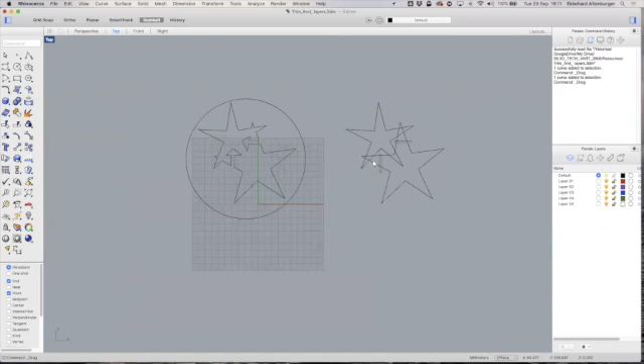We're sharing this screen. Let's say you want to make a plaque with these two stars. You will probably start with something like this, and you want to get these little triangles in so you can make connecting points. You need these little connecting strips to the outside area, because if you cut these stars like this, the little triangles would fall out.

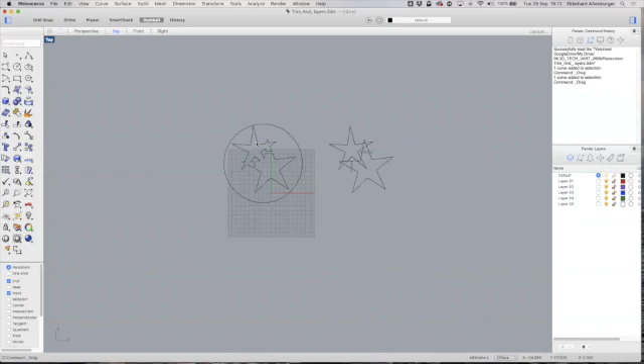I can show you how to design this one as well. You would go here, we've got a little polygon star option. You can select this and make a little star, a bit more pointy. We right click it and do another polygon star.

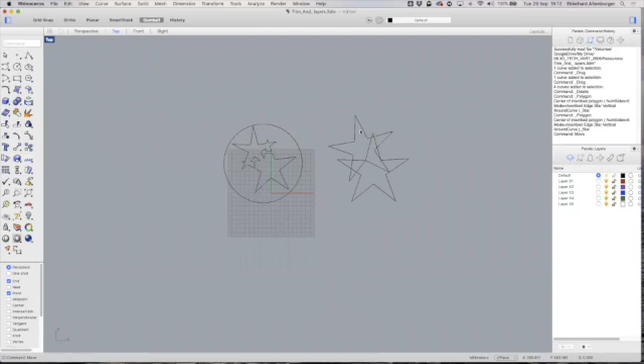Now we want to move this thing. I type in move, grab this one, and move it. I want to move it from here to here, not quite there. Move it using our little arrows, and we can rotate it a little bit like this. Yes, that is looking good.

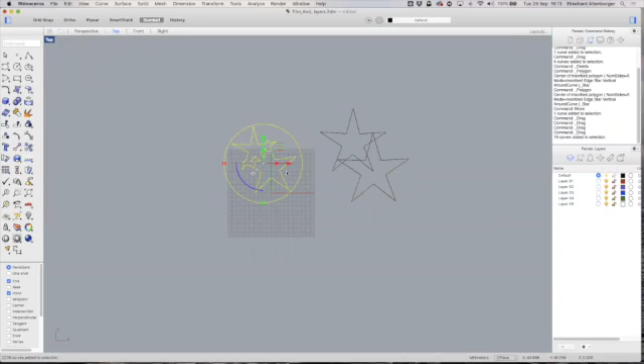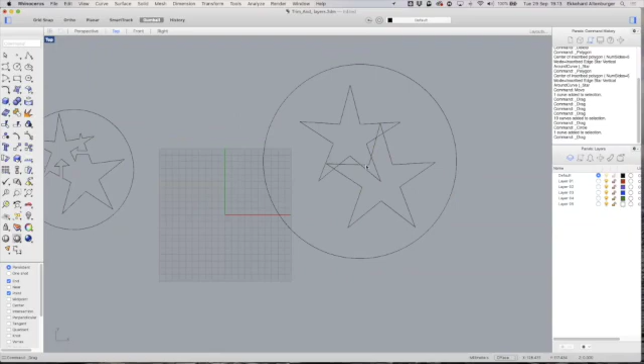Let's put this a little bit on the side because this is where I want to get to. If we want to do a circle, like a little plaque, a Star Wars-y thing, whatever, you want to cut this out so it's cutting through your material. Let's say you have black acrylic, and let's move this one up a bit so we can actually see this, over there a little bit, over here.

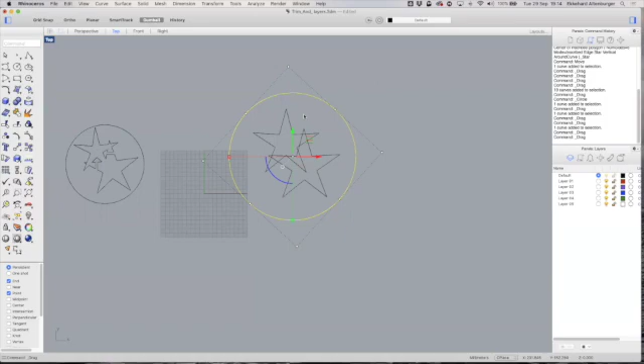This is good. Now we want these triangles and these triangles, not this one. Put it down, let me hit that then. Also scale this up a little bit, just scale it like this, so it only goes in two directions. If I press shift, it goes unilaterally. Okay, this is looking better.

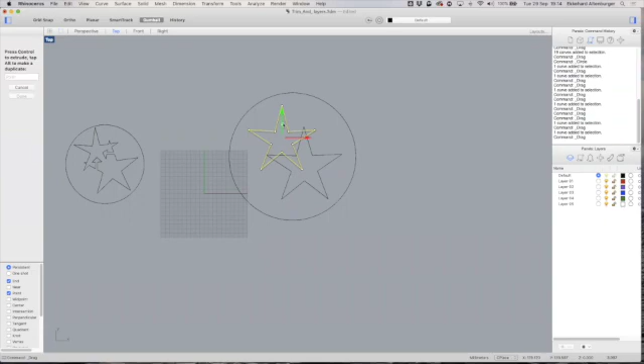So we want to sort this out so we have these little triangles here and here, but the laser is basically cutting these bits off. It doesn't rattle through here, so you want these nice flowing lines where the laser literally just cuts along and cuts everything out in one go.

So how do you trim lines? That's kind of a simple way to do it. You go to the trim option, that is this symbol, it looks like a board that is being wedged. You can go trim and untrim, so you click onto that. Then you see the option - for those who work with Rhino on Windows, this will be selected here on top. So whatever is selected or shown on the left in Rhino for Windows will appear on top.

Now we need to select the cutting objects, the objects you want to cut with. Imagine this is scissors - you want to keep this one, so you want to keep this and this and this line. You want to cut with this line, you want to cut these bits off. So you click onto this and press done.

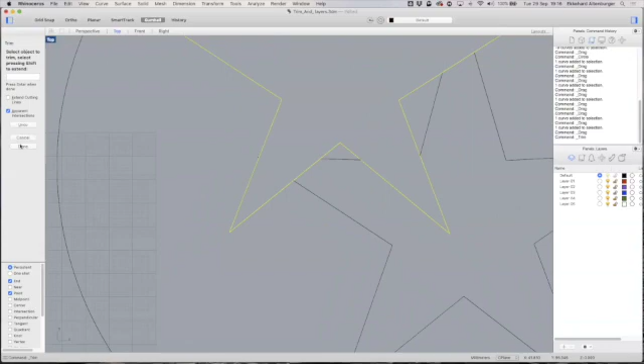Now you get this option: select objects to trim, select, press shift to extend. We can basically select these bits here, and then these bits are falling off. And also here, because we don't want the laser to rattle through, we want to keep this spickle here. Now the problem is the laser - let's click onto this, so it's done now. We also have a little triangle there which we can actually remove.

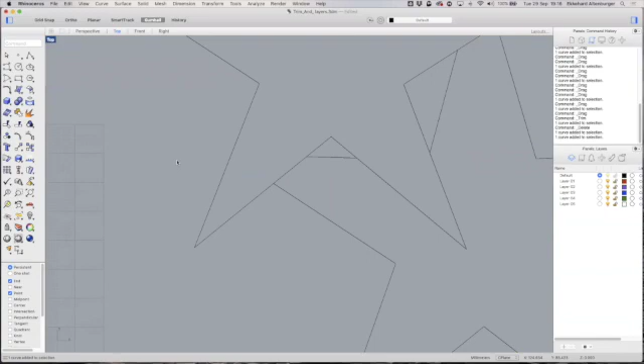We don't want the laser to cut through here, the laser should just run along here. So this is not the cutting tool, but this will be the cutting tool. We right click onto our option, we go trim again, we can again get the select cutting objects, and we use this as a cutting object.

And we select this as a cutting object because we want this to remain. So we press done. And now we select the object we want to delete, the one we want to trim. It's this one.

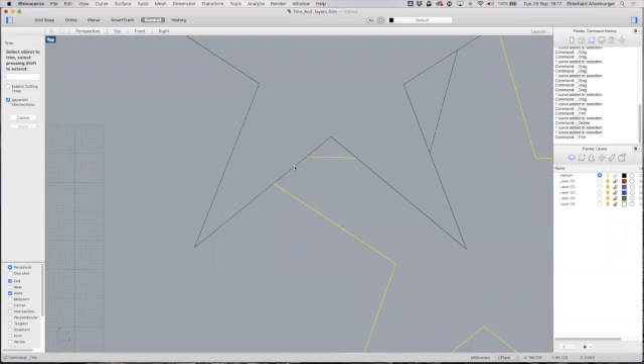Hold on, how does this work? Am I correct? We have these little spickles, and these little spickles, and we don't want to have this one. So we need to do that, done.

So we repeat that, right click, trim. Sometimes you really have to figure out - so we want to have this one, and we want to remove these bits here. So we press done. You can also press enter.

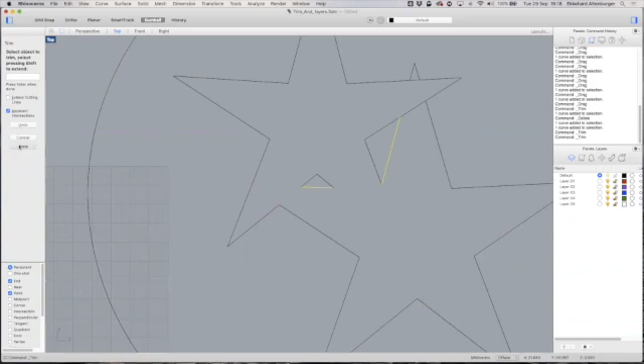And now we remove this. Is this correct? Yes. We also - you basically do this quite often. So you repeat trim. So I want to keep this triangle here. I want to remove this one and this one.

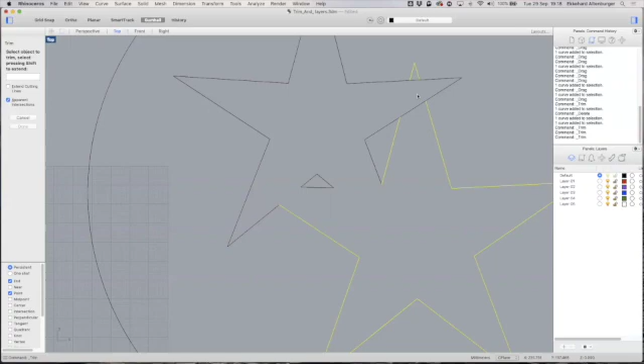So I select this as a cutting tool, and this one. So now I want to delete this one and this one. Yeah, so this is already looking good.

Now we have the problem with these little triangles. So yeah, they're quite important to.

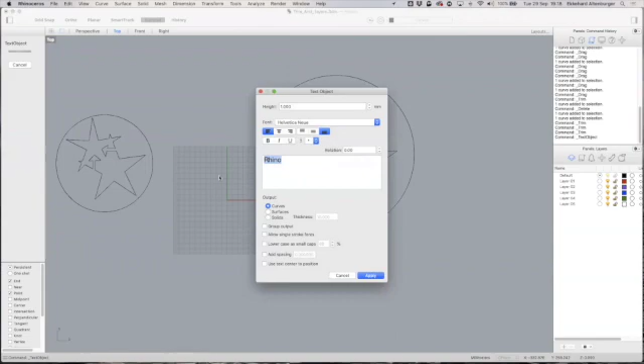So this is very often the problem. For example, if you - let's say we have an A. Well, let's do an A. Do a big A here. This one.

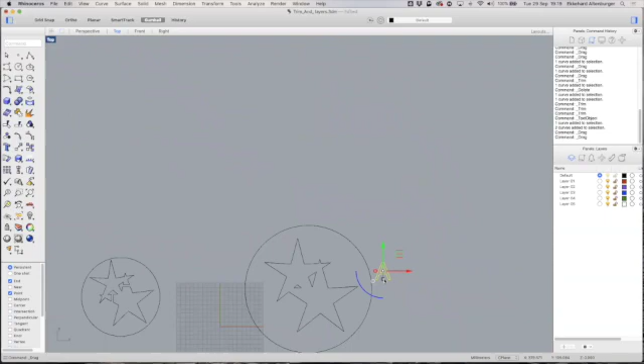So it's a very small A here. Hold on, let's make it big. I think some of you had these sort of problems this week with a letter.

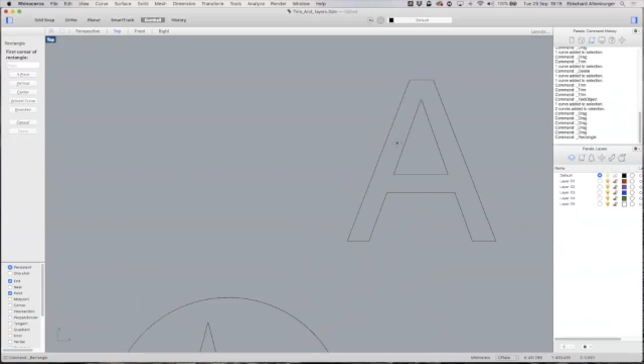If you cut this out with a laser cutter, this triangle falls out, and very often you see that you have this sort of a little connecting line. So you can do that like this, just very quick. So I would make a little strip like this, and I would move it perhaps here, rotate it.

Obviously you can do a much better job. So if the laser, if you want to cut out this area with the triangle inside, you can connect it to the outer world. Let's say you want to stick it in the square. Yeah.

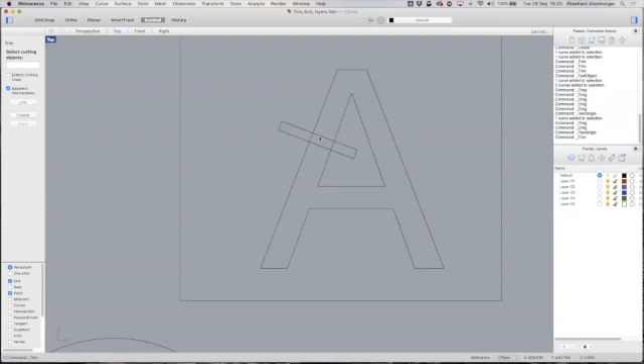So that's quite easy. So here again, go to trim. You select this tool here with a sort of broken bar. You go trim, select the cutting objects. I want this to remain, but I want this to move out. So we select this one, press done.

So we want to have this bit out, and we want to have this bit out, because if the laser cuts through here, we would basically cut this thing off here. So, okay, now press done.

So that's still not good. If your laser runs along here, it will still cut this inner piece off. So we need to kind of get these bits off here.

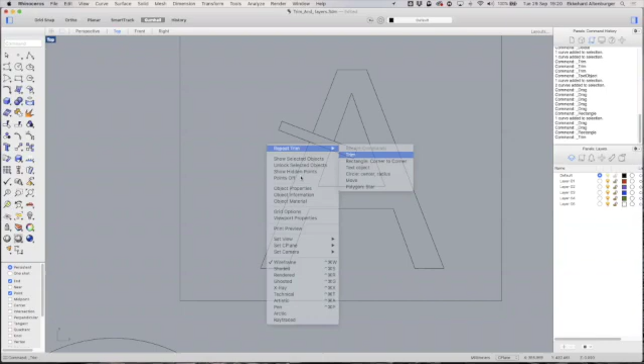So we again select trim, and we select this one and this one as our cutting object, and we select now the objects we want to trim. So that's this one and this one. Is that correct? Yes.

It is sometimes a little bit confusing, but you can also basically imagine this to be a pool with the A sticking out. This is like a wall that sticks out of the water. Yeah, so the water would run all along here and would run into this channel and fill this triangle. Yeah, so imagine this is sort of filled and raised.

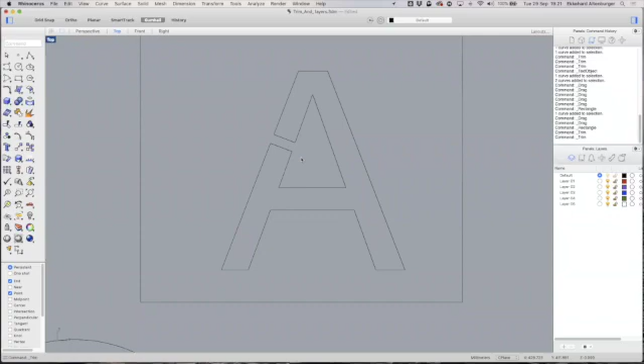Yeah, so that's the way to do it. So with the trimming option, you really need to kind of keep your mind switched on how the laser works through, because I have seen a number of students really try hard to edit their cutting plates, and they were just literally cutting off fingers, the connecting fingers, connecting areas that they wanted to interlock, and so on and so forth. So you just imagine what you cut through and what you want to remain, and this needs to be connected to like the outer area, for example.

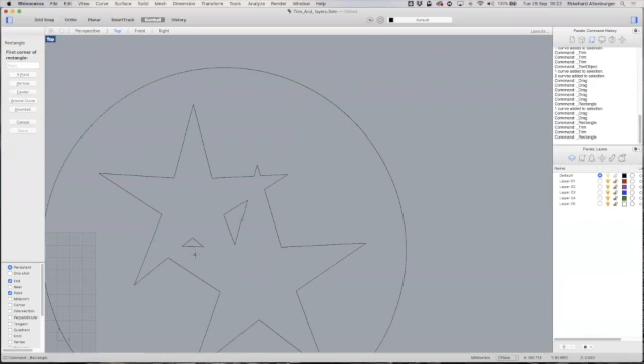Yeah, here. So we have the same problem here. So there are all sorts of ways to do this, but let's go an easier route. Yeah, so we can do exactly this one and another one. We right click, corner to corner, this one.

So we want these triangles to connect to this outer area so that they remain, otherwise they just fall out. Again, we go to our trim option.

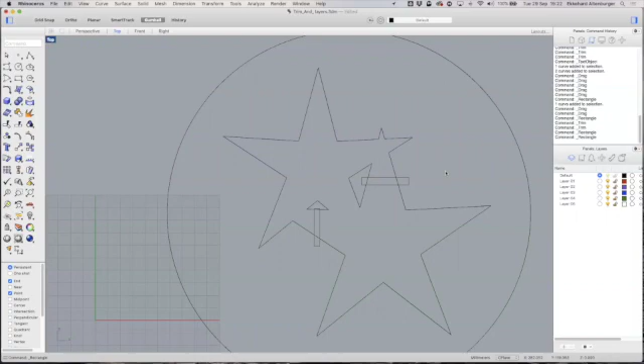We select the cutting object. We first want to remove these bits here. Now we select the areas we want to cut away - these bits here, this one here, and this one here. We press done, and now we repeat trim.

Now we select this one, this one, this one, and this one, because we want to cut these bits off. We select this one.

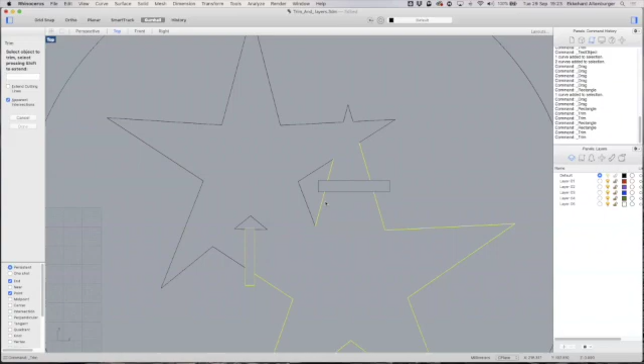Now we select the object to trim. We want to trim this one and this one, and done. We need to repeat this one, repeat trim.

So we select the cutting object. It's this one and this one and this one and this one. Press done, and we trim this one and this one. Here we go.

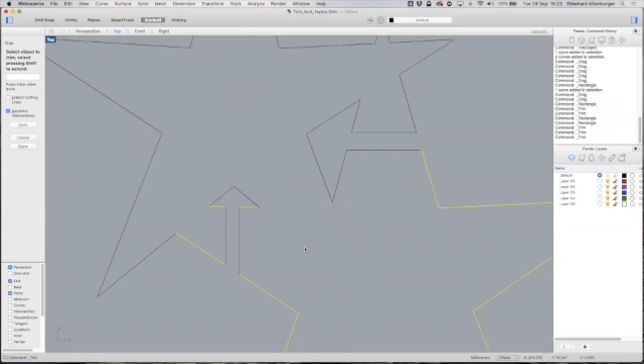So when our laser cuts through, these little triangles remain. This can obviously be done much neater, narrower, whatever. You can make more connecting corners, or you could, for example, put a little star in that is connected to one of those areas. There's a lot you can do in the design.

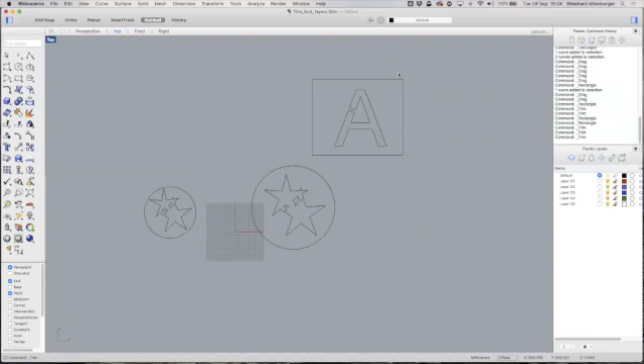You see this sometimes when you make a spray template too - if you want to tag a name somewhere, or do graffiti with a spray template, very often you see these simple connecting markers that connect the inner part with the outer part. Sometimes quite useful if you want to make stencil work, for example.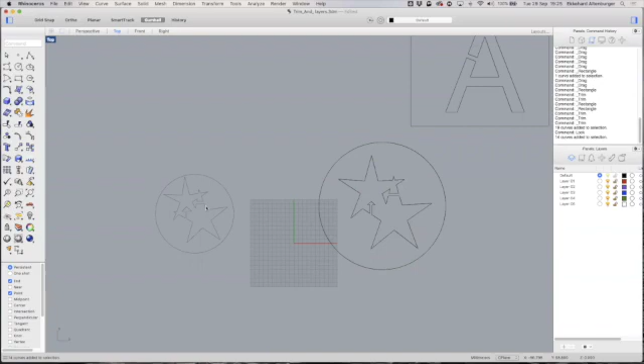Another thing that I have discussed and is really important is that you can lock areas. You just type in the command lock, and then you see the area here that is locked turning gray. Whenever I click on it, trying to select it now, nothing happens. If I select this one here, obviously I can select areas. If I press unlock, the whole thing unlocks.

Another tip - at the moment all these three objects, everything in here, is in the default layer, so everything is black. This is the selected color. You have various layers with various colors, and this is a very good way, if you have more and more objects in your design, to separate things into layers.

What you can do is, at the moment if you click on these ones, obviously these are all individual lines. What you can do is I would always group this one - you type into your command 'group'. So this is a group now. Whenever I click onto it, the whole area is activated, and that's very often already good enough.

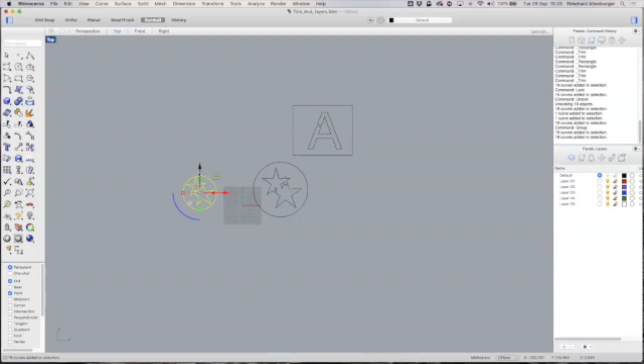So you can move these things around, and if you want to edit this one, you ungroup - type in 'ungroup' again. So at the moment this is not grouped, and I can also select this one. And I repeat group, so we have another group here. So we can move this around. This is also not grouped, so we can also group this.

Right-click, repeat group. Okay, if you want to have these objects in different layers, this is very simple. You activate whatever you want to put into groups, and you target - let's say you want to put this one into layer 1, or let's say I want to put the big A in layer 1. You can double click on layer 1 and name it 'big A'.

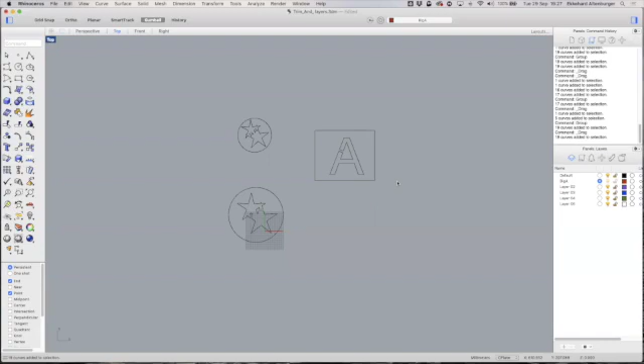At the moment, the big A still has a black marking, the outline is black. It is still in the default layer. If I highlight this, I activate the big A, and go to this big cheesecake here in your tools palette - it always looks like a French cheese to me, with the colors of the tricolor.

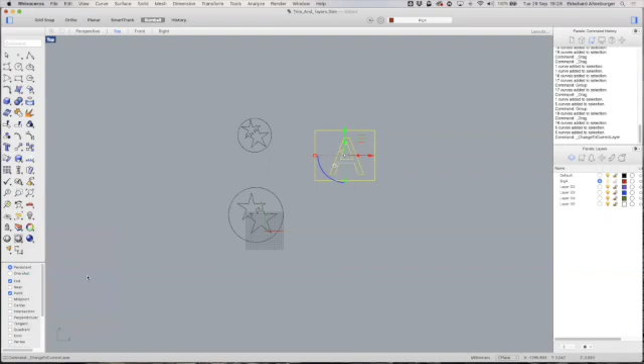And we get all these layer options. This is the layer option. One command I use a lot - you could also type it in here - is change object to current layer. My current layer is tagged blue, and I have activated the big A layer. The A is still in the default layer. I activate this object and say change the object to current layer, and you see the color of the object you moved to layer A also changes - we get this red that is indicated here.

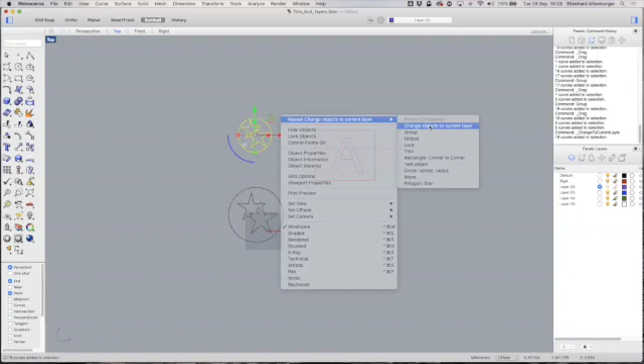We can do the same. Right click, change object to current layer, but we want to put it in this layer. So right click, we change it to this layer, and it appears in this violet color. Same is true about this one - if we activate this, we go to our blue layer and again use the command change object to current layer.

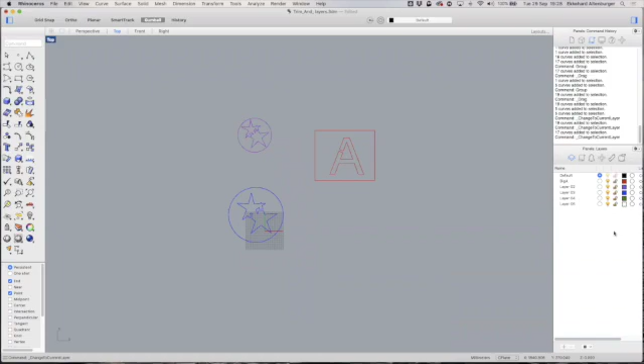The nice thing is, if you have a lot of items in your layer window, you can also just hide them by clicking those lamps. I think that's a very similar situation - you might know this from Photoshop already.

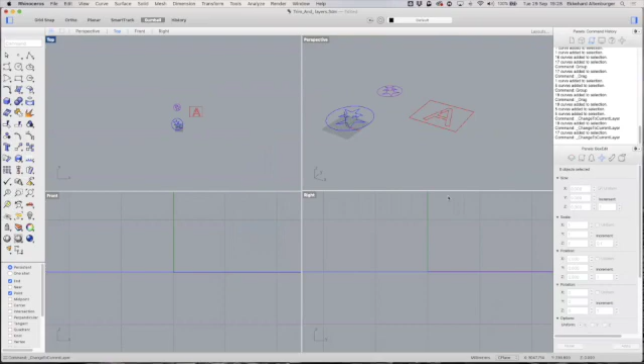Now if we go to our four-view perspective view, you can see all these cutting files are on the same zero layer plane. At the moment, everything here is in the Z-axis zero, so it basically lies flat on the floor. Imagine you have this thing and it falls on the floor - the floor is the zero layer.

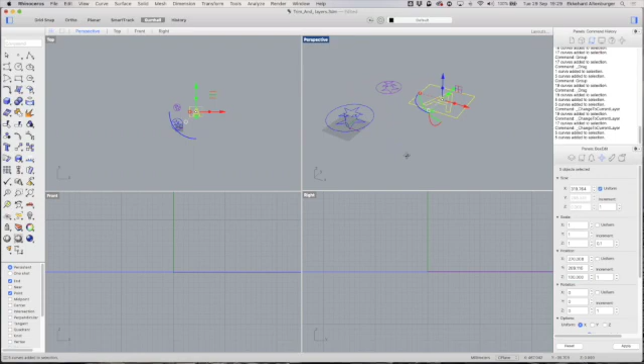So we can go to our A, and we want to raise it slightly, let's say to 100 millimeters, and we apply it - always important to apply it. You can see when you move, this is actually moving upwards. We can also select this one and go in a negative direction, minus 100, apply.

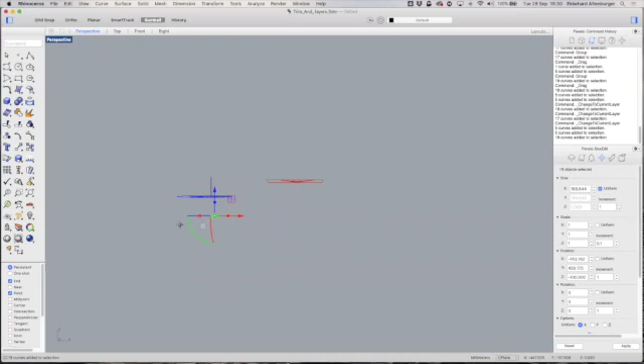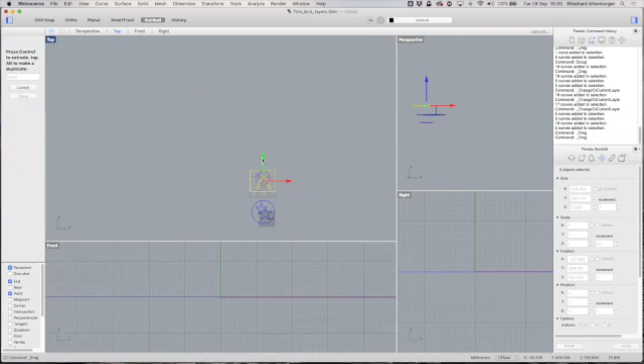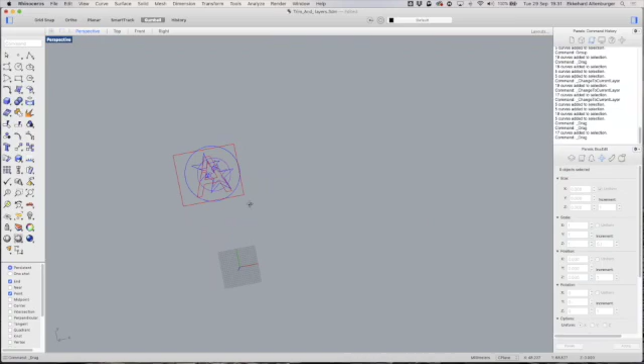And you can see, if we go into a perspective view, your objects now appear in 3 different layers. This is quite useful, for example, in the Monday woodworking class where I did a laser cutting exercise with a little lion head. If you want to work with various layers on top of each other and simulate how they look in space - at the moment it's very difficult to see how this might look, but in perspective view you can see how they're overlapping and how this might look in real life. If you do this with surfaces, you could simulate a house where you look through windows, doors and door frames - this is already moving into a third dimension.

Okay, I think that should be it for now - that was trimming and working in layers. Again, we go to our panels box - I prefer to work a lot with these. Again, you can click the lamps to show or hide areas, and you also have this little padlock where you can actually lock areas.

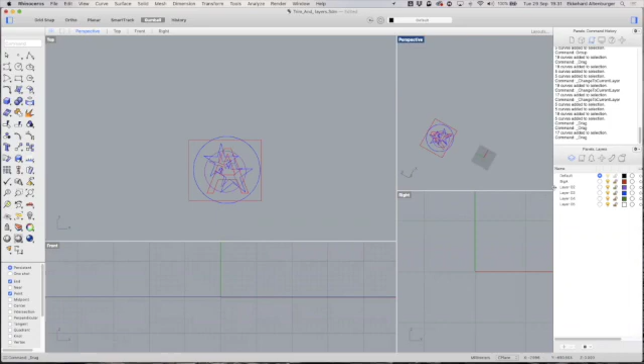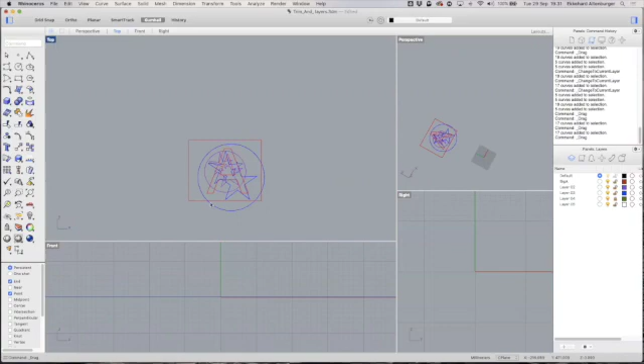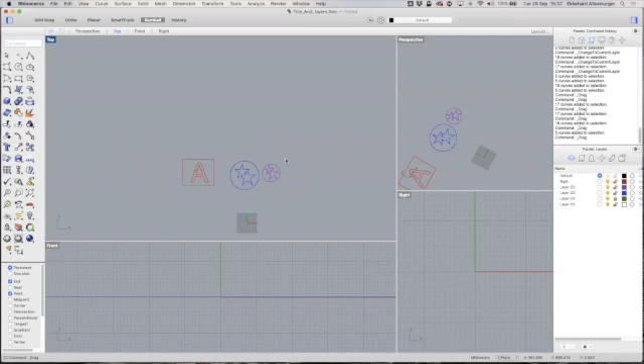So we can lock everything here - hold on, this is still not locked. Now everything is locked, I can't activate anything anymore. So you unlock it and you can move things. If you have a mess of everything here, it's actually quite useful to select, okay, I only want the object in layer 2 - I grab this and move it away, and I grab this one, layer A, move it here. I can show everything. So this is a nice way to move objects around and organize things.